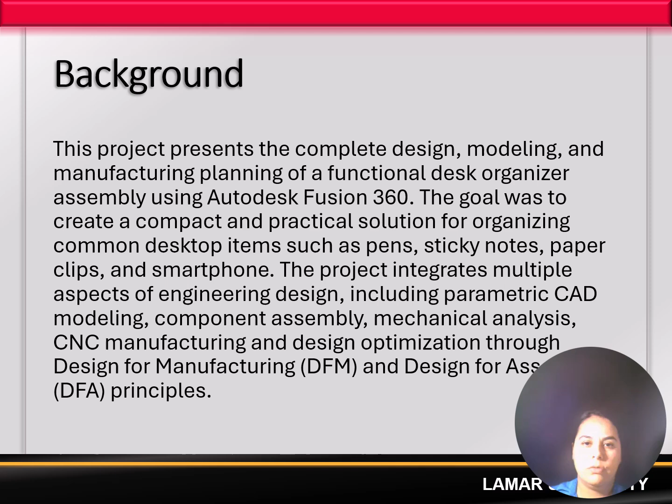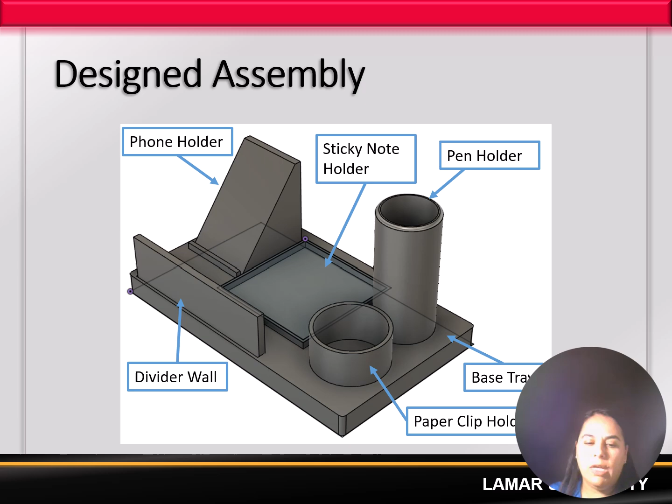Parts of the desk organizer. The desk organizer consists of 6 unique parts: the base tray, pen holder, sticky note slot, phone stand, paperclip cup, and divider wall. Each of these components was developed with manufacturability, functionality, and simplicity in mind.

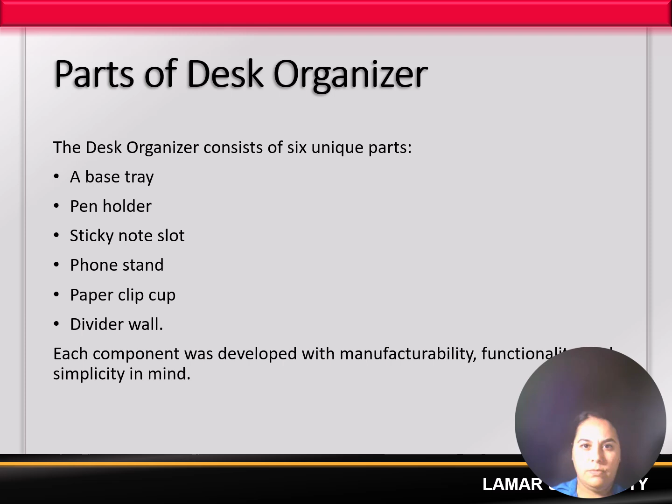So on this slide, we have all the components. Let me go over how we created the 3D CAD models in Fusion 360. For the base tray, we started with the top view. We created a rectangle with dimensions of 180 by 120 millimeters, and then extruded to create a 15 millimeter height. Then we filleted all top edges to 3 millimeters, and created the pockets for each of the components for proper alignment.

As for the sticky note slot, we started with the top view. We created a rectangle with dimensions of 80 by 80 millimeters, and extruded to give it a height of 10 millimeters, and then we created the pocket.

As for the phone stand, we started with the side view. We created a rectangle of 70 by 60 millimeters. We extruded 50 millimeters to create that width. Then we created a diagonal face cut at a 60 degree angle, and then we grooved the base.

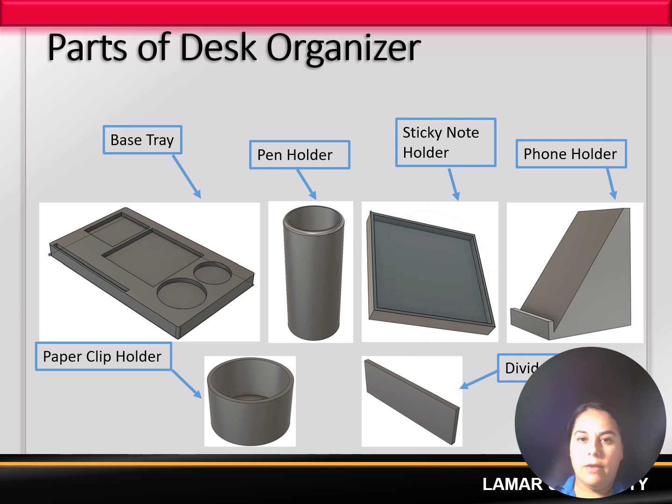We've broken this section down, covering the base plate portion of the manufacturing design into a couple of categories: starting with the part overview, next the material and setup, following the sequence of the process, and also then covering tool paths and tools. When we go back and look at the overview here, we can see that the base plate is a flat tray comprised of both circular and rectangular pockets for the design.

The design here, we're going to be using a 3-axis CNC milling tool to actually manufacture this part. As far as dimensions, this is going to start off at 180 millimeters by 120 millimeters by 15 millimeters. As far as the material and setup, ABS plastic or aluminum 6061 can be used to manufacture this design.

Followed by the machine, a 3-axis CNC mill. As far as the stock setup, we're doing the WCS at the top left corner. The sequence we follow is in this order: starting off with the face top, adaptive roughing, pockets and contouring, and then finishing. An optional chamfer or scallop, which will be covered later in the presentation, could be set up.

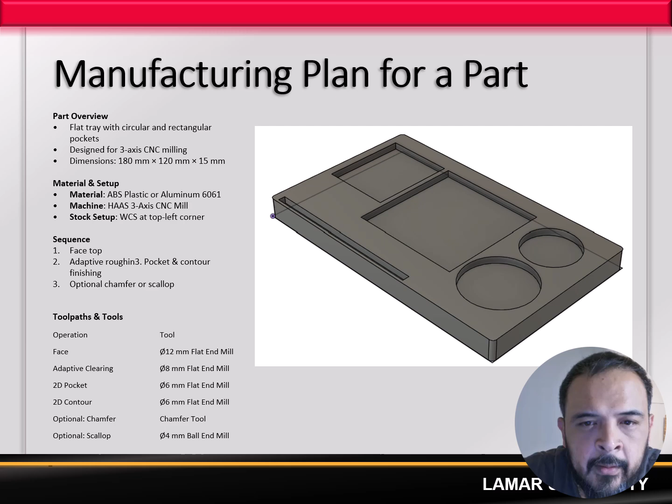The DFMA considerations are the following: we selected a standard tool diameter of 6, 8, and 12 millimeters for accessibility and cost efficiency. We also added corner radii to allow tool access and reduce stress concentrations. We consolidated the pocket depths for fewer tool changes, and ensured flat bottom pockets for easy cleanup and inspection.

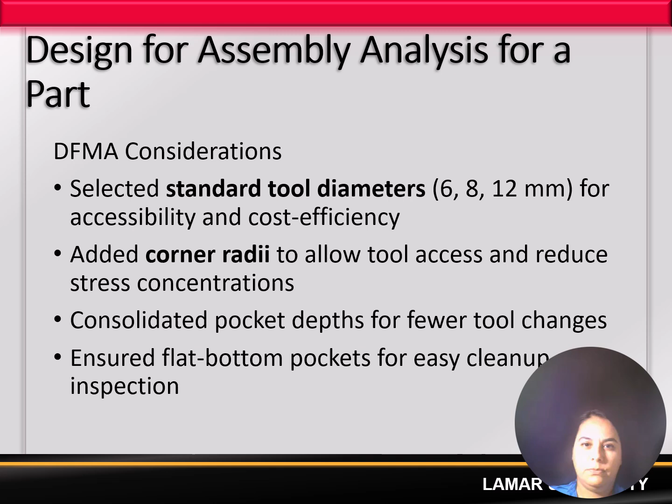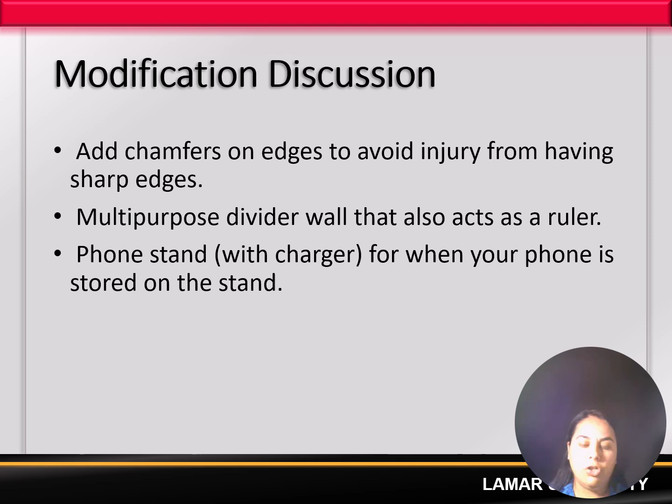After a few discussions, we came up with the following modifications to the model. We will be adding chamfers on the edges to avoid injuries from sharp edges. As for the divider, we're going to utilize it as a multi-purpose wall that also acts as a ruler. And for the phone stand, we're adding a charger for when your phone is stored on the stand.

So here's the final list of the desk organizer, with the 6 unique parts. The base tray will be modified as previously mentioned, with a chamfer added to the edges to avoid potential injuries. The pen holder and the sticky note slot will stay the same. As for the phone stand, we are adding a built-in charger. The paperclip cup will remain the same. The divider will also be utilized as a ruler, so this one will have a change. Each component was developed with manufacturability, functionality, and safety in mind.

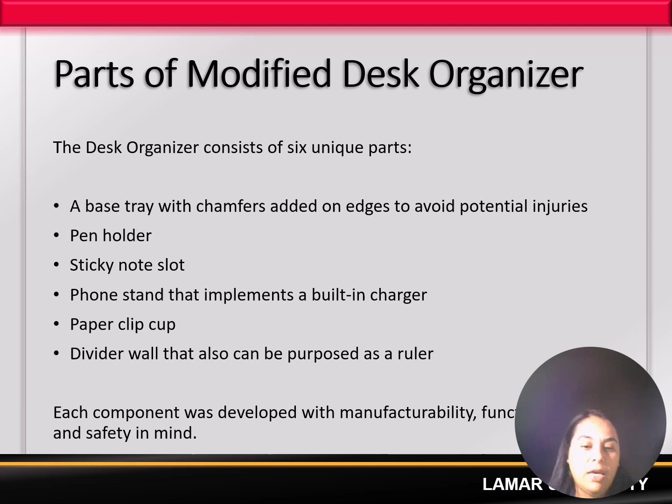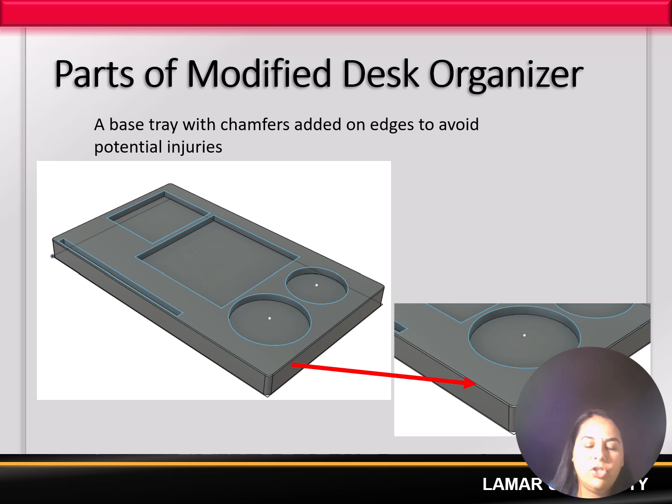Here's a picture of the 3D CAD model of the base tray with the chamfers added on the edges to avoid any potential injuries. And here's a picture of the divider that can also be purposed as a ruler.

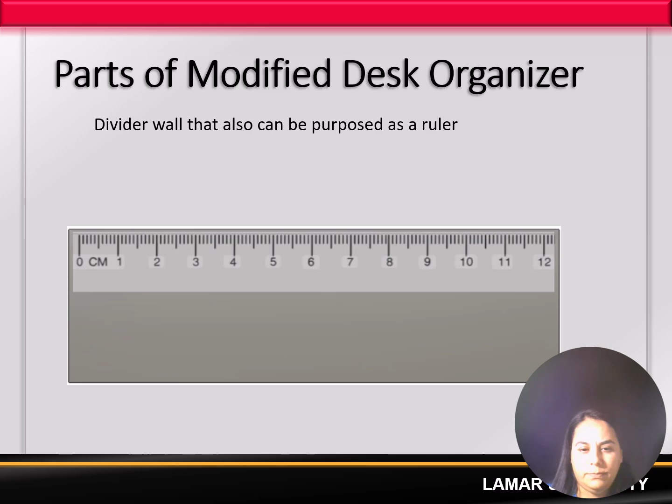In conclusion, the updated desk organizer maintains its essential functionality while effectively achieving the project's goal. The product is safer, simpler, and more effective as a result of careful use of DFM and DFA concepts. Even though improving functionality wasn't the main goal, it was inevitable to produce a number of enhancements. Future iterations might investigate the possibility of greater improvements. Thank you.